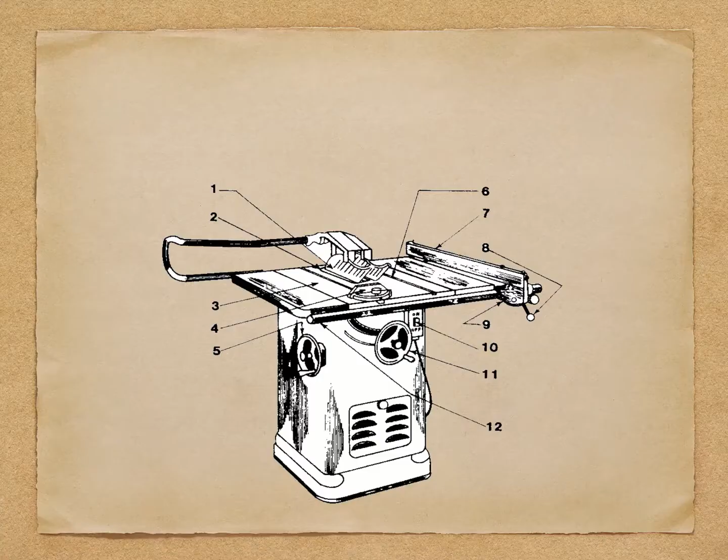No matter which type of table saw you encounter, they will all have the common parts and functionality that we'll be introducing in these next segments. This is a very quick overview of the major parts of a common table saw. We'll be looking at each with more detail for the next few moments.

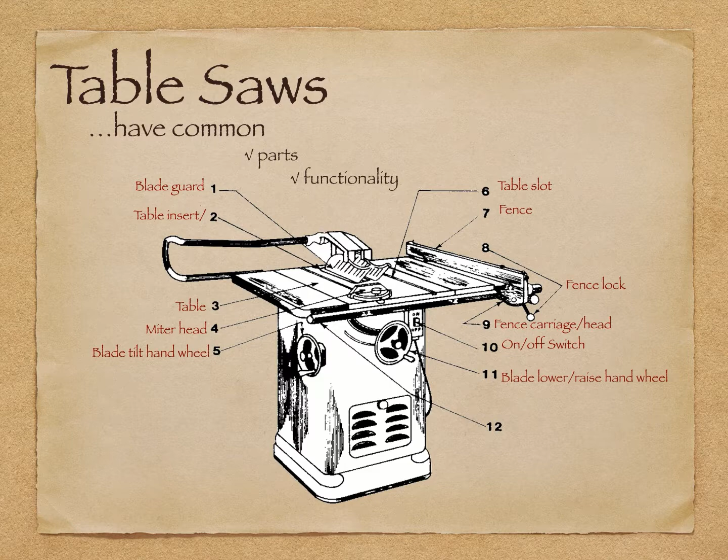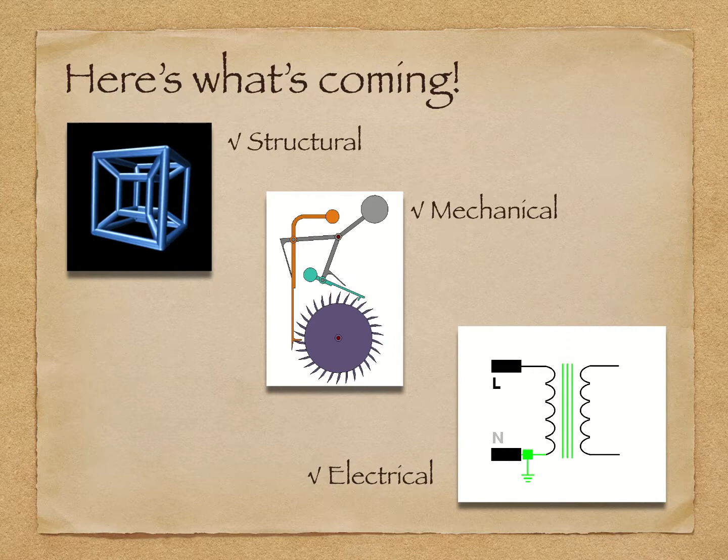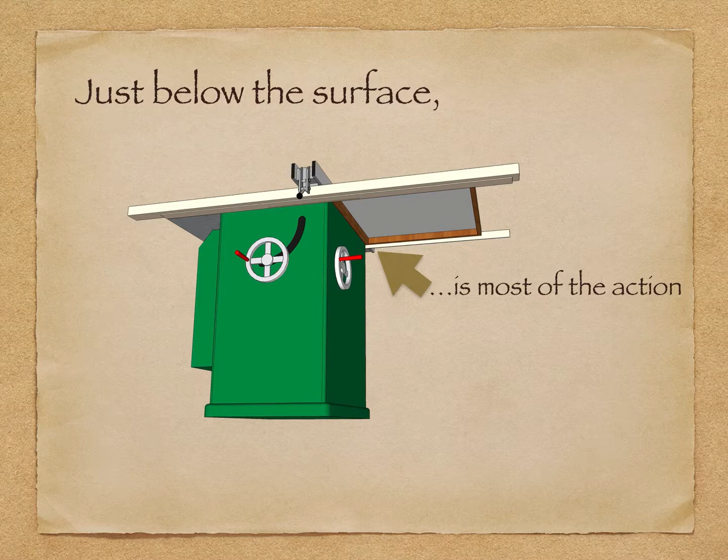To start with, we'll be showing you the structural, mechanical, and electrical pieces that enable a table saw to do what it does. Just below the surface of a saw's table, in its base, is where most of the action is. The base houses vital internal working pieces. Mechanical operations of a table saw involve several different pieces that have to work together.

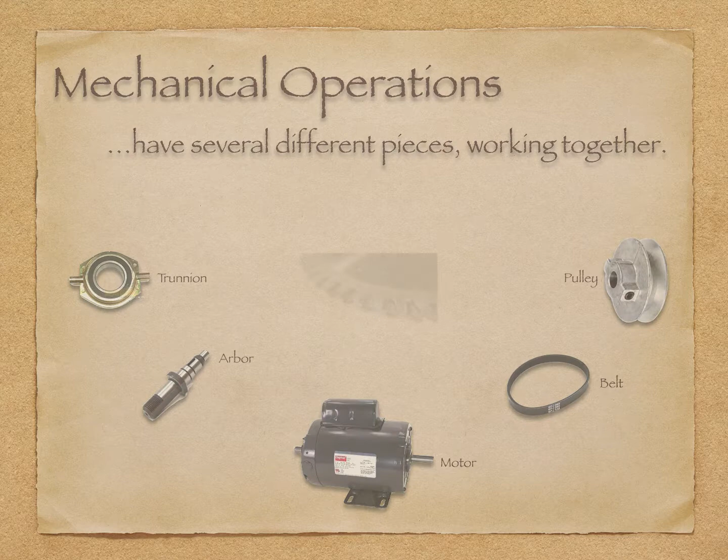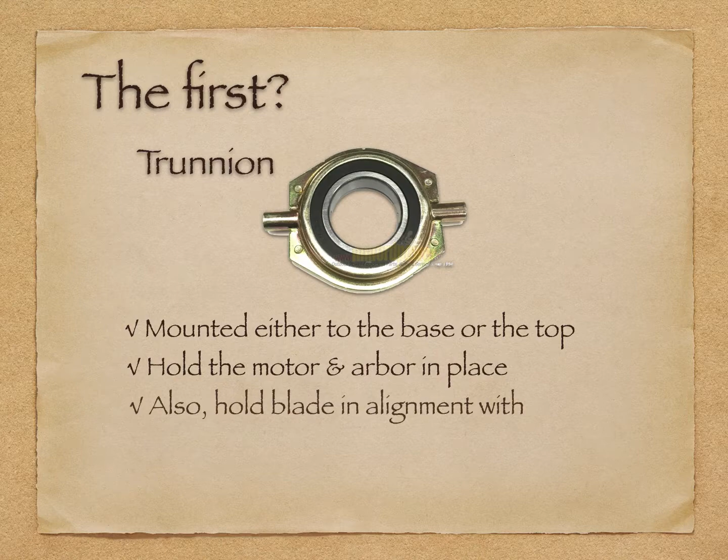The first of these parts are called trunnions. Trunnions are mounted either to the base or to the underside of the top. They hold the motor and a part called the arbor in place. Trunnions are also used to align the blade with the rip fence and the miter slot. The arbor is what the blade is attached to. Naturally, an electric motor powers all these working parts.

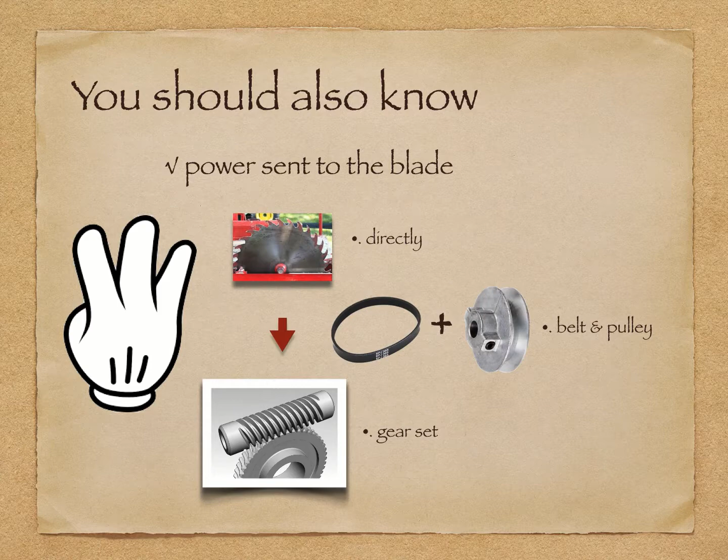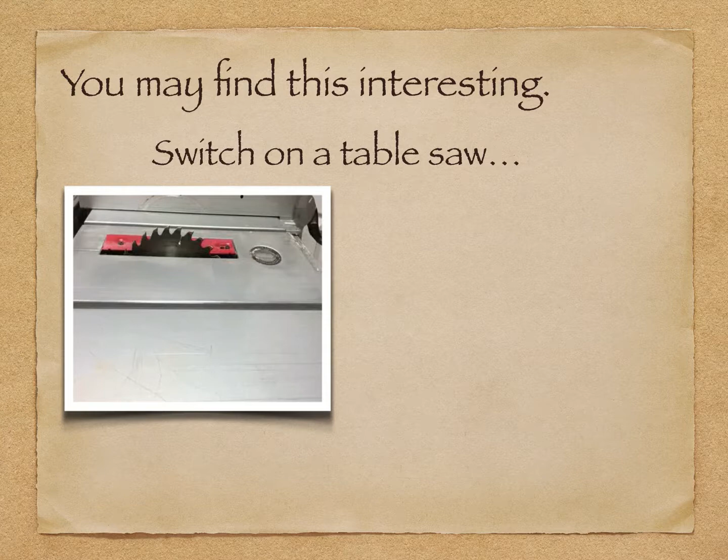You should also probably know that power is sent to the blade in three common ways. It is either provided directly from the motor to the blade, or by using a belt and pulley system, or by using a gear set. It might be interesting for you to note this little piece of information. If you have ever operated a table saw, or been around someone that has, you might have noticed that once it's switched on, it runs at full speed, almost instantly.

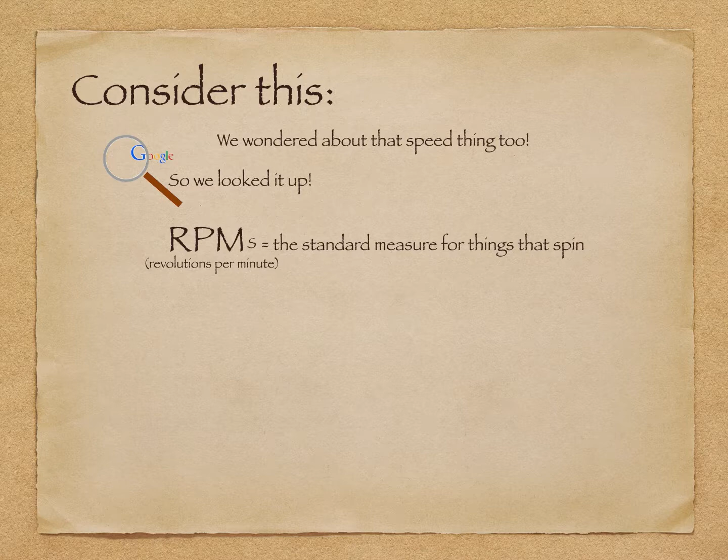In gathering information for this presentation, we wondered just how fast a typical table saw goes when a typical operator is using it. You may already know that revolutions per minute, or RPMs, is the measurement standard when measuring things that revolve or spin. We wanted to use a 10-inch blade, which is common to many table saws. The information we found for this example specified a 3-horsepower motor, which is a bit more power than a typical woodcrafter would need. We learned that such specifications would get the following in return.

If there was no load on the blade, meaning that you were not cutting anything, the maximum RPMs could reach as high as 6,500 revolutions per minute. That's about 108 revolutions per second. That's fast. Now, if you were cutting something, the operating speed, depending on the thickness of the stock and the condition of your blade, could range between 3,000 and 5,500 RPMs. That's fast too. The rest of the saw's action happens on the table's surface.